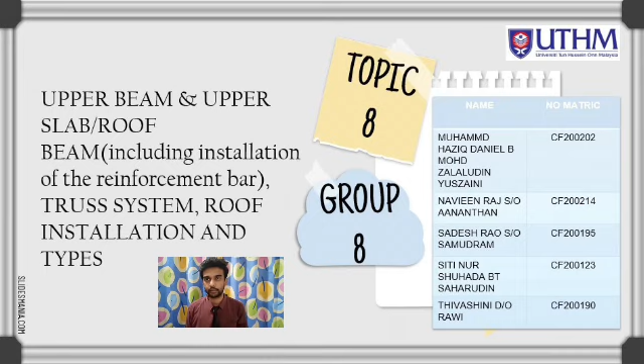We are going to present our group title using PowerPoint slides. In this video, we have discussed various chapters related to the topic.

Construction of the topic: construction is the process of constructing a building or infrastructure. Construction differs from manufacturing in that manufacturing typically involves mass production of similar items without a designated purchaser, while construction typically takes place at a location for a known client. Construction as an industry comprises 6 to 9% of the gross domestic product of developed countries.

Construction starts with planning, design and financing. It continues until the project is built and ready to use. Furthermore, large-scale construction requires collaboration across multiple disciplines.

A project manager normally manages the job, and a construction manager, design manager, construction engineer or architect supervises it. Those involved with the design and execution must consider zoning requirements, environmental impact of the job, scheduling, budgeting, construction site safety, availability and transportation of building materials, logistical inconvenience to the public caused by construction delays, and bidding.

Large construction projects are sometimes referred to as mega projects. Lastly, in this assignment, we have conducted a site visit to collect all the information pertaining to the project management. All the information obtained is recorded and shared in this report.

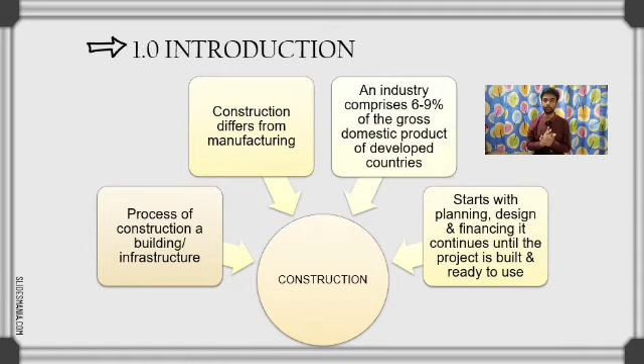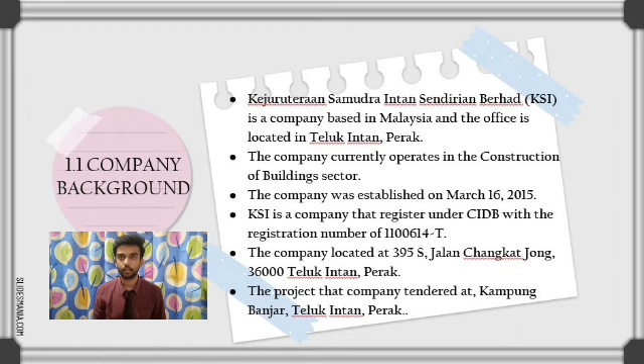Company background: the company that we have chosen for our project report is Kejuruteraan Samudra Intan Sendirian Berhad, also known as KSI Sendirian Berhad. KSI is a company based in Malaysia, and its office is located at Jalan Changkat Jong, 36000 Teluk Intan, Perak.

Secondly, the objectives of the project. There are two objectives: first, to understand the process of roof installation, and second, to study the types of roof and truss systems.

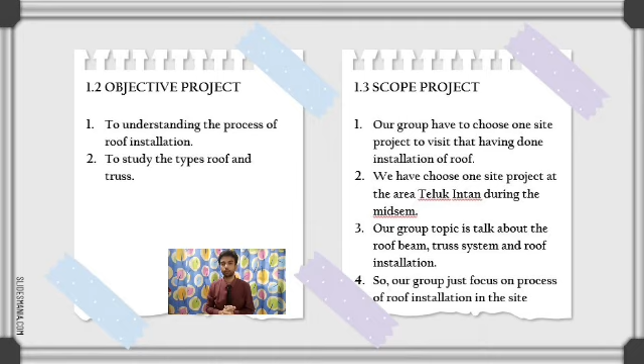Thirdly, the scope of this project. In this project, our group had to choose one site project to visit that had done roof installation. We chose a site project in the Teluk Intan, Perak area during our mid-sem break. Our group topic covers the roof beam, roof installation and truss system, so our group focused on the process of roof installation at the site.

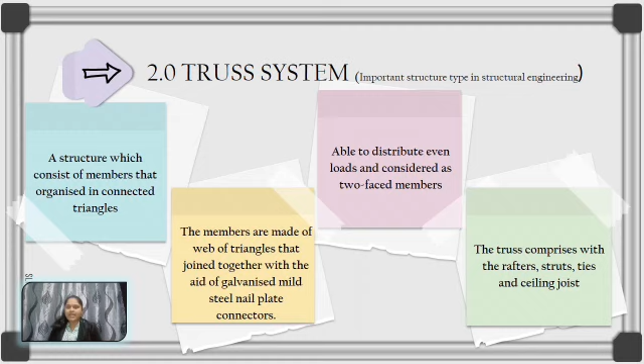Good day, myself Thivashini Rawi, and now I'll continue with the truss system. A truss system is an important structure consisting of members organized into connected triangles. Truss system members are made of a web of triangles joined together with the aid of galvanized mild steel nail plate connectors. It is able to distribute load evenly and is considered a two-faced member system. The truss comprises rafters, struts, ties and ceiling joists, which are often called ceiling ties too.

Two types of materials are used for trusses. One is timber, which has been the choice for modest-sized buildings, and short-span trusses of classic forms continue to be used for houses and other small buildings. However, steel was the material that mostly affected the development of new truss forms and the increased span of trussed structures. Presently, steel has become the new demand for longer spans and taller buildings.

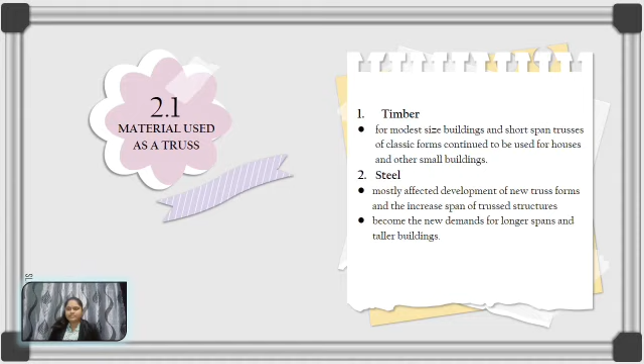For buildings, the principal early applications of trusses were in achieving the basic gable form roof, with two opposed sloping flat sides meeting at a ridge at the top and forming two drainage edges at the bottom sides. A horizontal tie across the building at the eave elevation held the two edges from thrusting outward, forming a single triangle truss. In due time, however, the horizontal members became used as framing for a floor or ceiling space for the lower space. As building sizes increased, the sag of the horizontal members required consideration, and the multiplication of internalized triangulation of various basic truss forms began.

There are some advantages to using trusses. They are good to use in constructing a roof system. By applying this method, it is much faster and more economical to use prefabricated trusses in place of rafters and joists. Moreover, it takes significantly less labor than stick framing. At the same time, a truss can span a greater distance without a bearing wall.

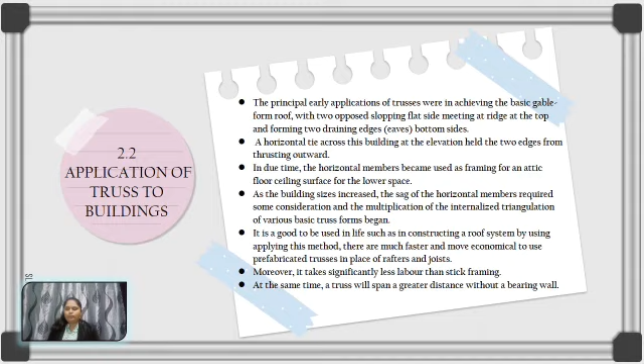The two main functions of truss are to carry the roof load and to provide horizontal stability. These are the types of trusses: the king post truss, Pratt truss, queen post truss, Howe truss, and the fan truss.

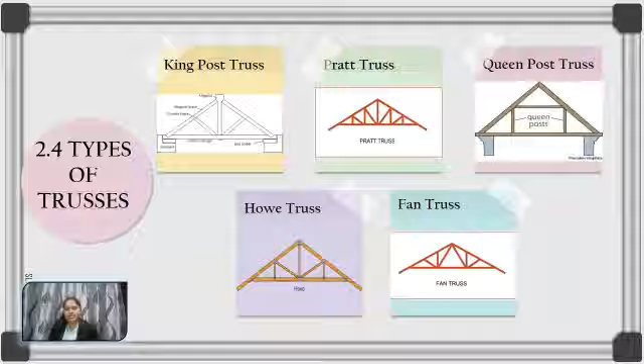I'm going to talk about construction sequence, advantage of using trusses, manpower, the duration of the construction, machineries and tools for the construction, and safety precaution sequence.

We start with fabrication, where the size and shape of the trusses are fabricated by the manufacturing plants. The considerations to choose the trusses include cost, fire requirement, and local availability.

Next, the setting out, where the setting out should be the same as the drawing. Next, for transportation, there are factors that need to be considered: constraint on the trusses frame configuration and the size of the trusses.

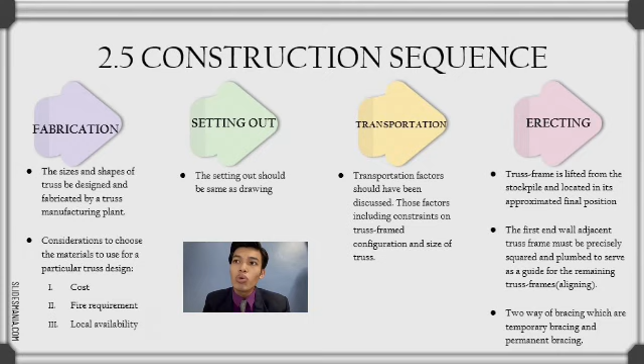Lastly, for erecting, the truss frame is lifted from the stockpile and located in its final position. The first end wall adjacent needs to be squared and plumb to serve as alignment for the other remaining trusses. There are two ways of bracing: one is permanent and one is temporary.

Advantages of using truss: first is quick installation, where it can be installed quickly and cost effectively. Second is increasing the span, allowing the span to increase over a longer distance. Third is accessibility — for example, the triangle shape allows space for installation of electricity and other utility applications.

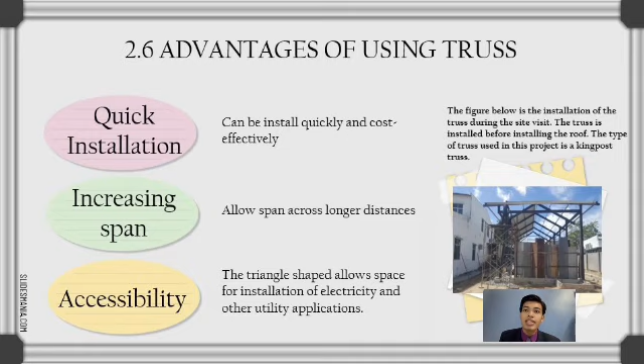For the manpower, or the roofer, the job scope is to inspect all the damage on the roof, estimate cost and material needed to fix or build the roof, including installing insulation, cutting material to fit the corners and against the wall, and sealing all leaks that need to be avoided. The job skill requirements are balance, strength, stamina, and obviously not fearing heights.

For the duration of this roof construction, it depends on the size of the property, roof home design, trusses framework, structural integrity, type of roofing material, roofing contractor experience, climate, and weather.

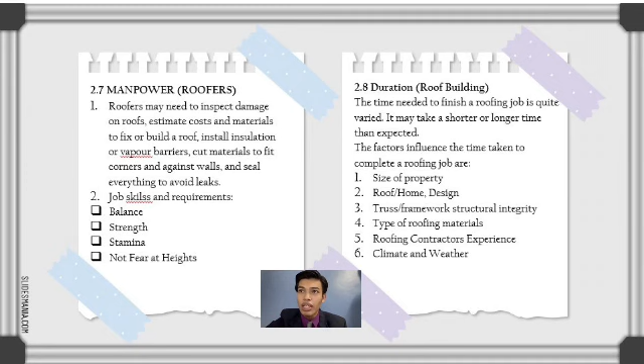Next, machineries and tools for construction: roof tiles making machine, metal roofing machine, roofing nailer, roofing hammer, roofing shovel, caulking gun, pry bars, framing square, chalk line, tin snips, hammer tacker, saws, cleanup tools, and lastly ladders and extension ladders.

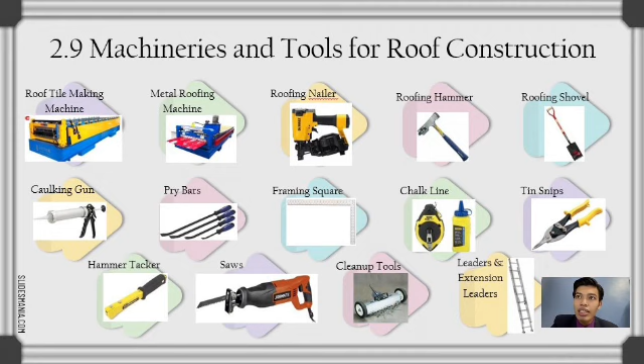There are 10 safety precautions that need to be followed to execute this roof construction. First, always begin with a pre-start talk. Second, work only during good weather and avoid extreme heat and cold. Third, the ladder must be stable and properly secured or tied off.

Fourth is wear proper PPE — that's important to do. Fifth, carefully position ropes and extension cords so they are not underfoot. Sixth, sweep the roof before and after work to keep it clear of dirt and debris.

Seventh, use guardrails whenever possible. Eighth, skylights should be guarded appropriately. Next, be careful of slate and tile roofs. Lastly, signage should be visible in your work area to make the surroundings aware.

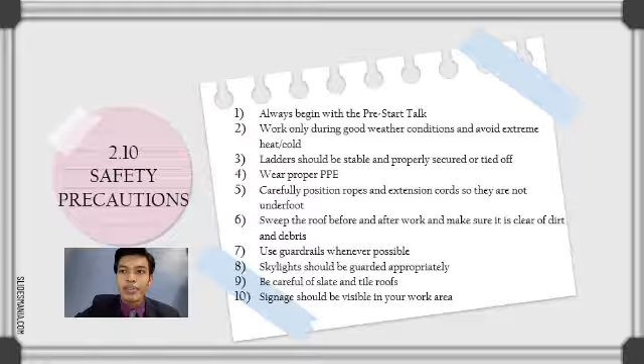Okay, now we go to chapter 3. First, roof beam. Roof beam is a load-bearing member that is integral to the strength of the building. Roof beam supports the floor or roof above, joists, trusses, and other roofing elements. Roof beam will be the thickest and most important element of the roof or levels within a property. Roof beam is made of timber but can also be made from steel, concrete, or manufactured wood. Roof beam is a vital component in structural integrity and is also attached to walls to stop them from spreading or leaning in.

Now we move to what is the difference between a beam and a joist. The difference is beam supports the joist — usually one beam supports many joists. They are both as important as each other, looking up at the roof from the shell of a house. For example, one long beam running through the length of the home with multiple joists leaning on it for support.

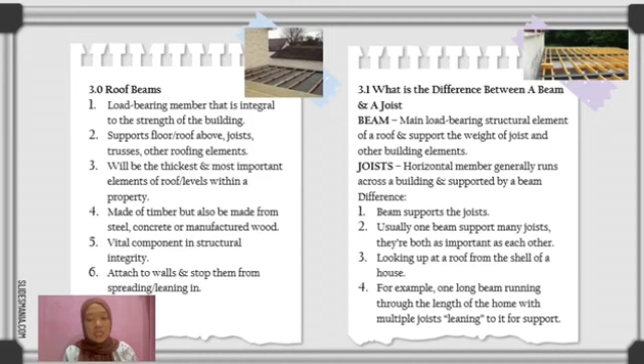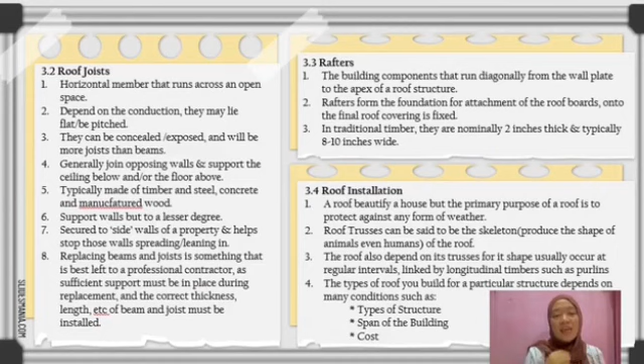Next, we move to the roof joist. Roof joist is a horizontal member that runs across an open space. It depends on the construction — they may lie flat or be pitched. They can be concealed or exposed, and there will be more joists than beams. Roof joists generally join opposing walls and support the ceiling below and/or the floor above. They are typically made of timber, steel, concrete, and manufactured wood.

It also supports walls, but to a lesser degree, securing to side walls of a property and helping stop those walls from spreading or leaning in.

Next is rafters. Rafters are building components that run diagonally from the wall plate to the apex of a roof structure. Rafters form the foundation for attachment of the roof boards onto which the final roof covering is fixed. In traditional timber, they are nominally 2 inches thick and typically 8 to 10 inches wide.

Next we go to the roof installation. First, a roof beautifies a house, but the primary purpose of a roof is to protect against any form of weather. Second, roof trusses can be said to be the skeleton of the roof.

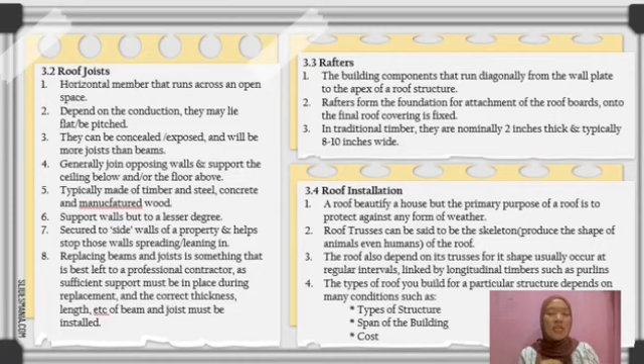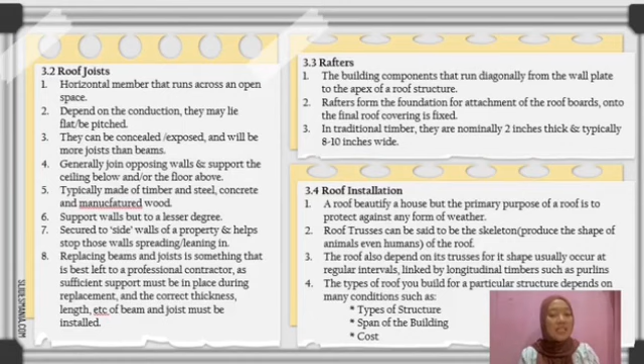A skeleton produces the shape of animals, even humans. The roof also depends on its trusses for its shape, usually occurring at regular intervals, linked by longitudinal timbers such as purlins. The type of roof you build for a particular structure depends on many conditions such as type of structure, span of the building, and cost.

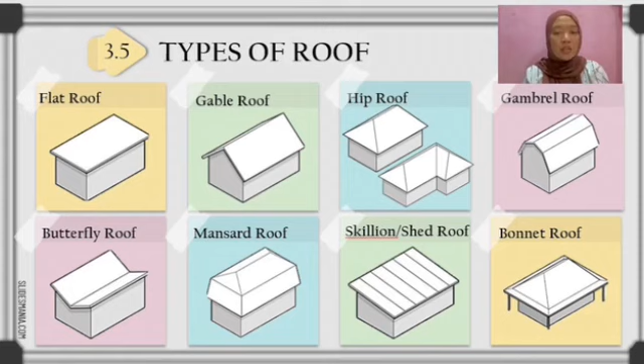Now we have 8 types of roof: flat roof, gambrel roof, hip roof, gable roof, butterfly roof, mansard roof, skillion or shed roof, and lastly, bonnet roof.

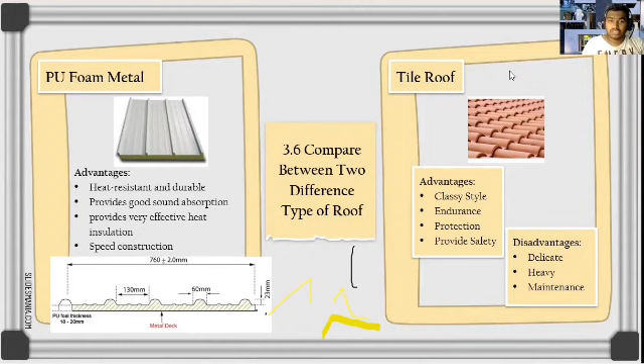Second is the roof truss installation process for wooden roofs. For wooden, we have 5 simple steps. The first one is designing the roof truss.

Second is to saw the truss. Third is to arrange the truss. Fourth, secure the joints, and finally install the trusses on the roof.

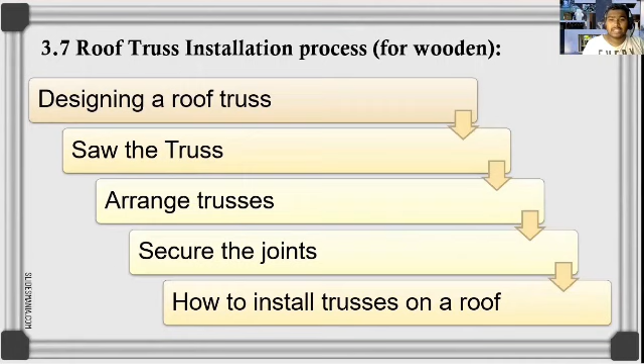Based on how to install trusses on a roof, I have a simple installation explanation here. First, the polyurethane foam arrives from the factory. When the polyurethane foam arrives from the factory, it's lifted by the crane into the site.

Then the columns are being installed, and the fascia has been installed. The top chord is arranged and fixed with the fascia. After that, the roof battens have been installed.

Then the polyurethane foams will be arranged according to the roof battens. The workers or the person in charge on site arrange the roof polyurethane foams according to the roof battens.

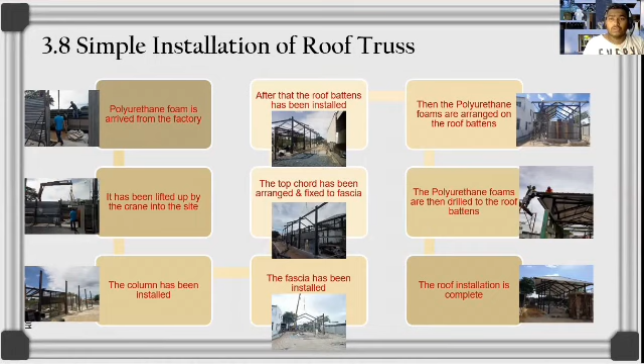And the roof panels are drilled into the roof battens to make the connection. At last, the roof installation, while it may seem complex, is actually a very easy process. The duration for this may take around 1 or 2 hours for this kind of simple installation process.

In a nutshell, the roof construction or beam construction provides a structural barrier in the interior of the house against the fury of the storm, and it takes the wind force to wall elements that direct this force down to the foundation.

A poor roof installation or construction may cause other construction parts to be questioned and may affect the building itself. It is very essential to hire a proper contractor to ensure the roof does not leak and is a heat insulator of good quality, complementing the overall appearance of the building in design, material, color, and look scheme.

A few factors are very important when building a roof or beam, and many criteria in the construction, such as manpower, machineries and tools, duration of the building, and safety precautions applied during the roof construction work.

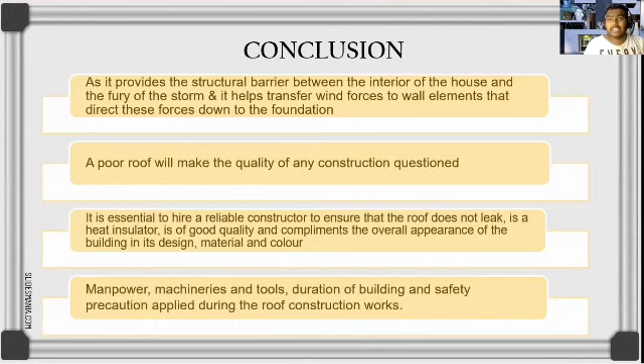In this report, we as teammates will learn more about the installation process, the types of roofs, the types of beams, the type of beam installation, the factors affecting the installation process, and many more.